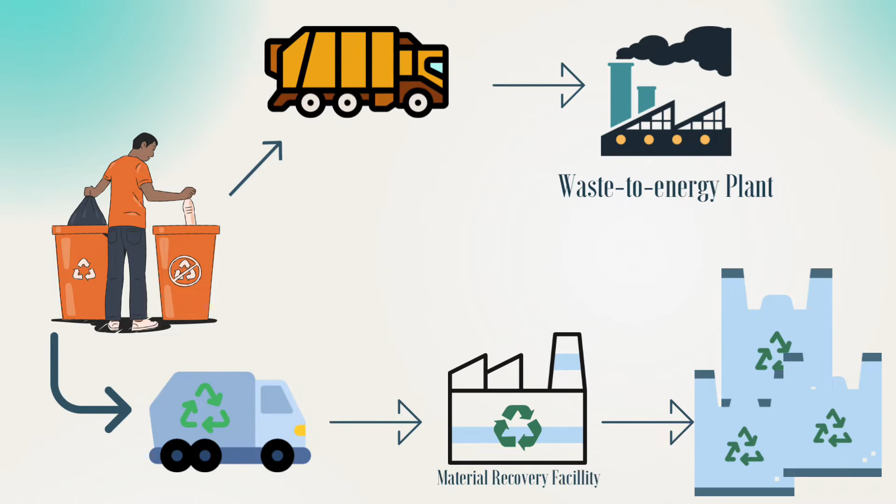Sadly, 15 years from now, the landfill will be filled with trash and thus, the lifespan of this landfill is shortening. Let's look at how waste is managed and treated in Singapore. Solid wastes are separated and transported to the designated facility. Municipal waste is sent to the waste-to-energy plant to burn the waste to further reduce the size of the waste. Recyclable waste is transported to a materials recovery facility to be further recycled.

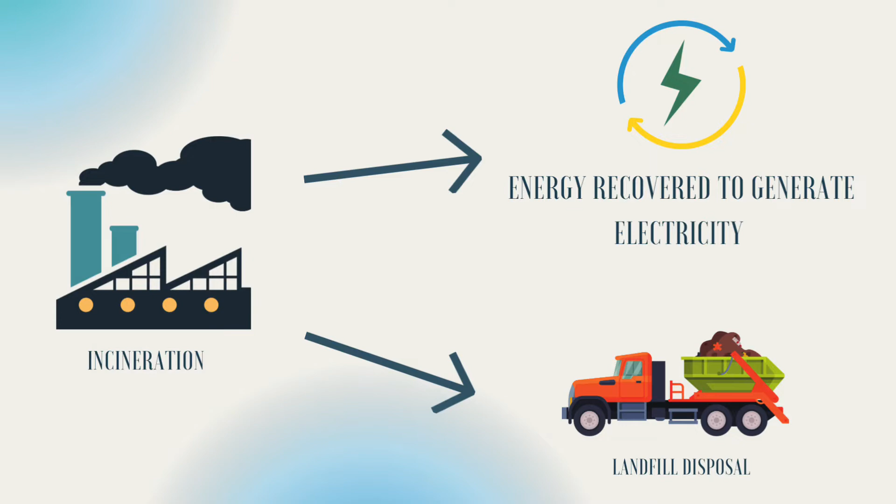As I mentioned in the previous slide, municipal waste is burned in the incinerator and recovered energy is used to generate electricity. Incinerated bottom ash and fly ash are transported to Pulau Semakau for landfill disposal. How can we make solid waste treatment of incineration more sustainable? As we know, incineration leaves a reduced quantity of waste called ash. There is bottom ash and fly ash.

Ashes have their own composition from different types of solid waste. There are municipal waste, industrial waste, and agricultural waste. The focus is municipal waste incineration ash, as we can further repurpose it into useful contributors. These compositions present in the ash can be either extracted or further treated, and the use of technology will help make the treatment process more efficient and sustainable.

Moving on! Let's look at the technology in the treatment of ashes. First, we have an ash melting furnace, plasma type. It is designed to treat different types of ash waste such as waste incineration residue, medical waste, low-level radiation contaminated waste, and many more. The ash is fed into the ash inlet, melts using ultra-high temperature, and the furnace is kept under negative pressure, which enables the ash to form into recyclable slag and metal. It is operated with low electrical power to detoxify the ash without causing pollution.

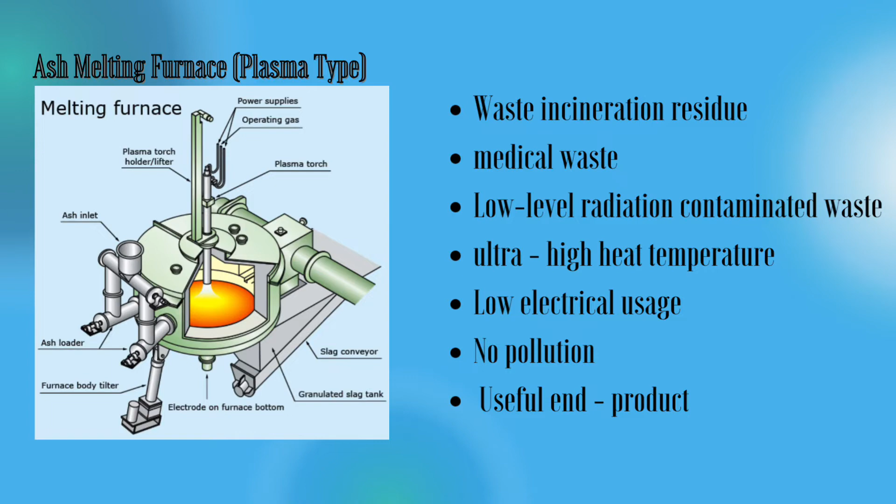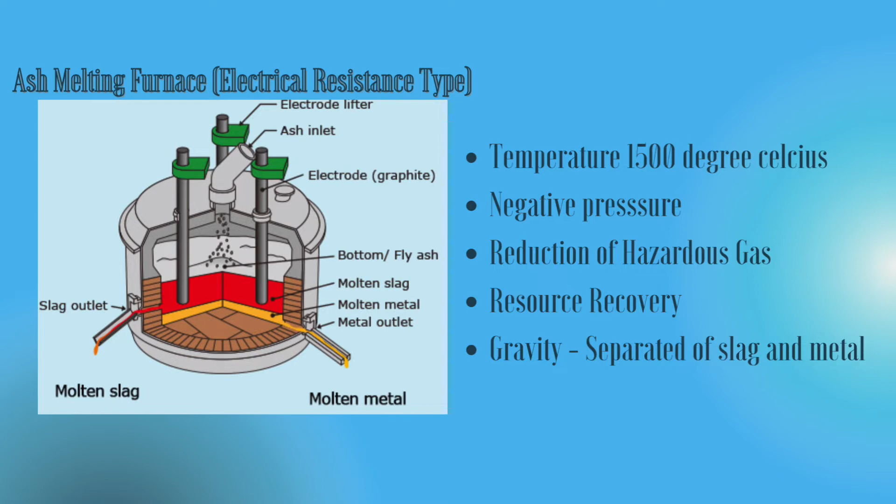Secondly, ash melting furnace, electrical resistance type. It is designed to treat both incinerated bottom ash and fly ash. The ash is fed into the inlet at the top and passes through to be melted by the extremely high heat temperature. It is operated under stable conditions to melt the ashes and produces molten slag and molten metal. This process also reduces the generation of hazardous gas. The slag and metal are said to be of excellent quality and can be used for cement concrete.

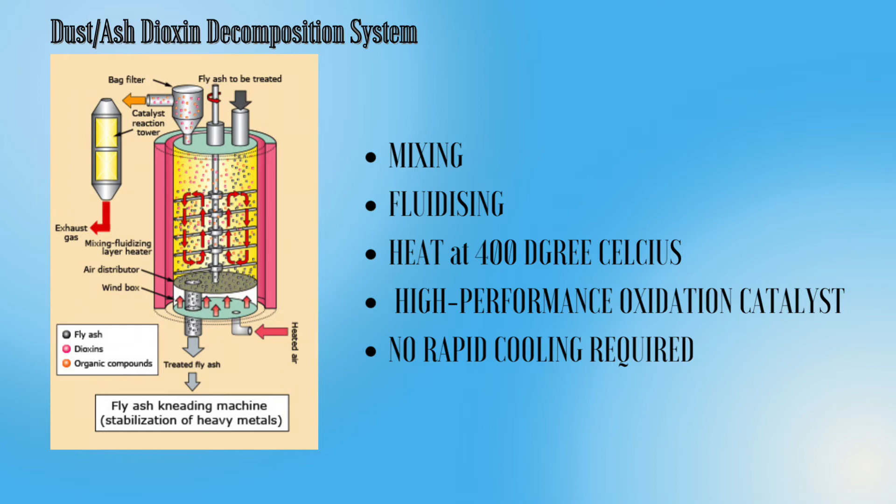Thirdly, the collected dust/ash dioxin decomposition system. This system is created to treat the decomposition of dioxin and hazardous contents contained in fly ash. The fly ash is fed into the reactor and separates the dioxins and hazardous organic compounds by mixing and fluidizing. Then, further heating and decomposing by high-performance oxidation catalyst, so the treated fly ash does not contain organic chloride compounds.

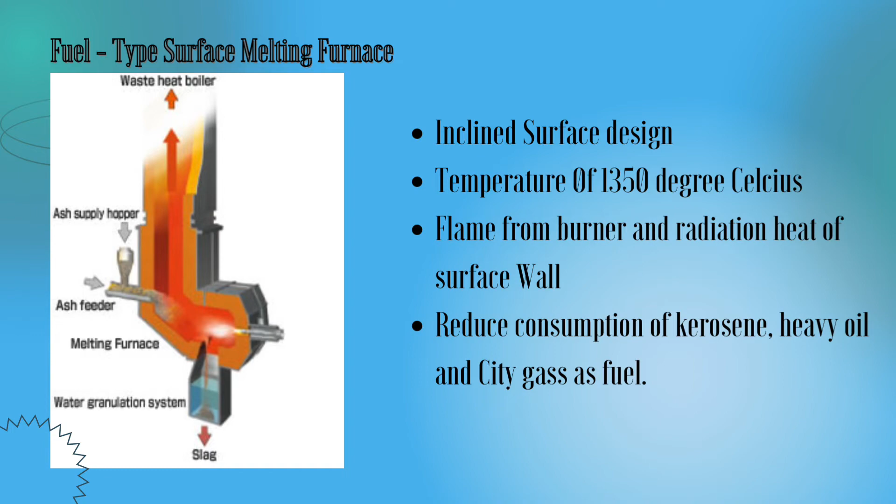Fourth is the fuel-type surface melting furnace. It is shaped, inclined, and operated at high temperature, using flame from the burner and radiation heat from the surface walls to melt ash. The ash is fed into the ash feeder located nearest to the melting surface. The ash is then melted, flows down and meets the water granulation system, where slag is produced. This technology is created beautifully by making use of the ash and waste plastic to replace kerosene, heavy oil, or city gas as fuel.

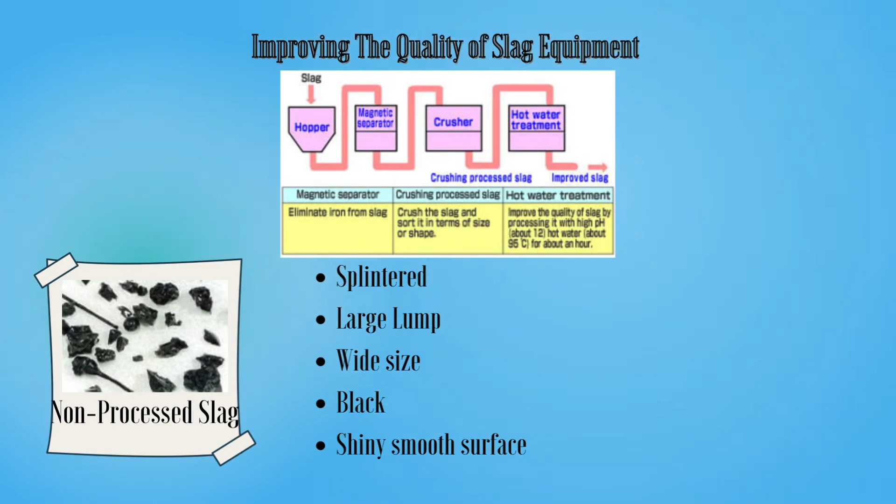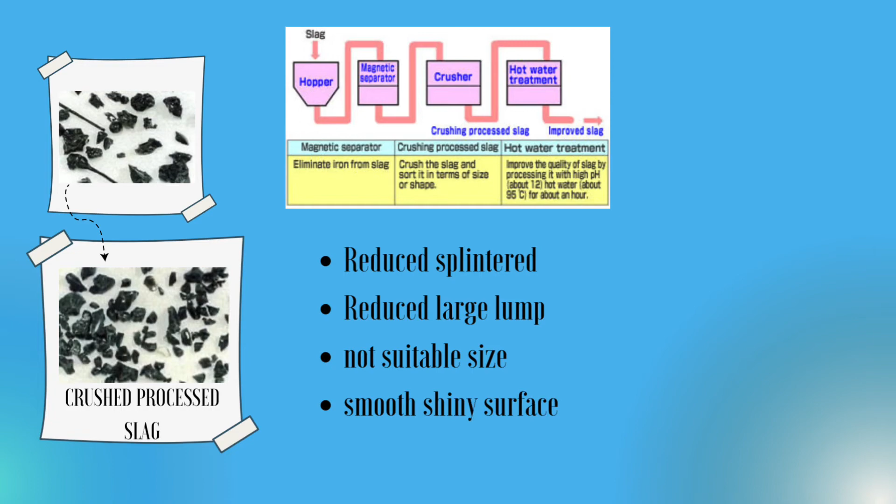Lastly is the slag quality improvement equipment. As bottom ash and fly ash have been turned into slag, we can improve the slag quality with this process. Slags are fed into the hopper, then it will eliminate the iron present in the slag. The non-processed slag is in large lumps with a shiny smooth surface. After the removal of iron, slag will be crushed and separated into its sizes. This is a crushing process where the size of large lumps is reduced. But this processed slag is not yet suitable to utilize.

After sorting into sizes, the slag will go through hot water treatment where it is treated with high pH water and high temperature to improve the quality of the slag. It has a similar character to river sand. With this technology, slag stability is boosted and it can be utilized for products.

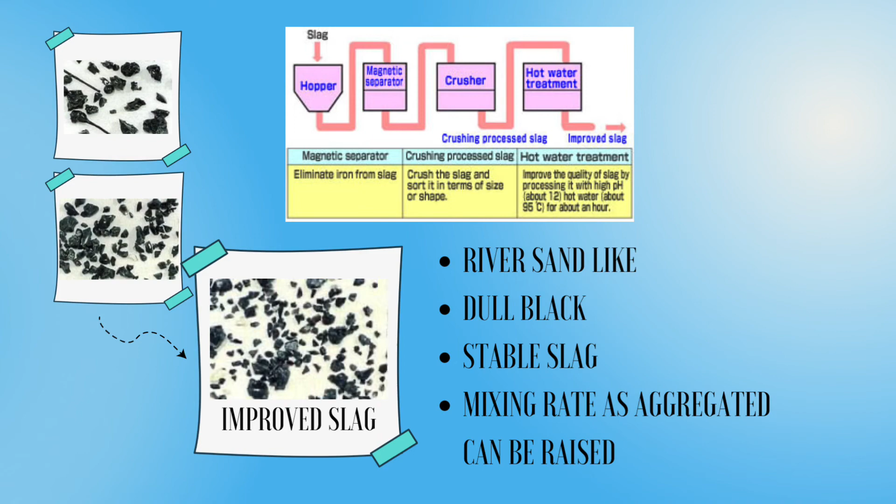Why is it important to treat the ashes? Repurposing is the goal of sustainability. As I mentioned before, ashes have many chemical compositions that make slag used in cement products unstable and may cause accidents. Efficient consumption of waste helps to repurpose long-term techniques to keep and conserve natural resources. Furthermore, these treatments proposed previously help to prolong the prevention of environmental pollution.

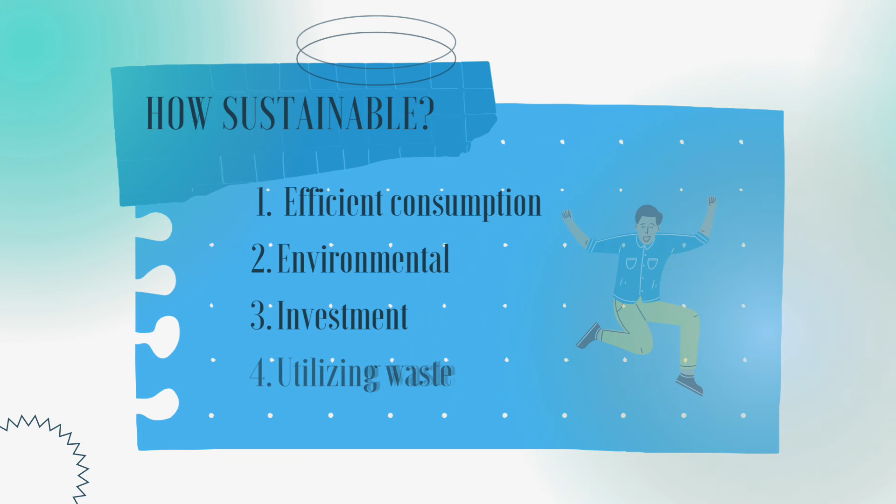Since electric furnaces are expensive, cost saving and efficiency will be in the interest of Singapore to invest long-term. Utilizing plastic waste while reducing the amount of ash waste at the same time increases the amount of waste recycled. Finally, the Semakau landfill will be saved from waste disposal, prolonging the lifespan of the Semakau landfill.